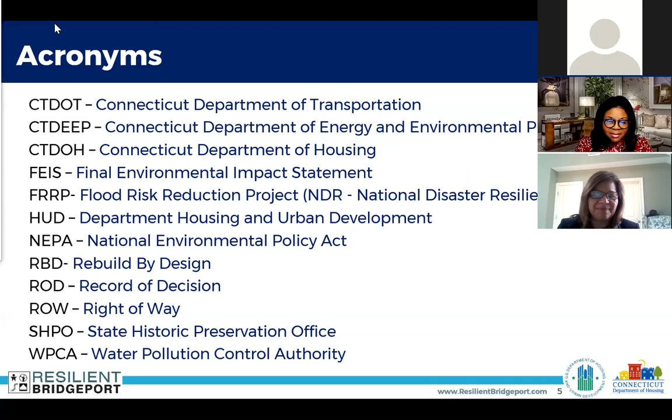Now I want to introduce you to the Resilient Bridgeport team. I am Shantae Hanks, the Deputy Commissioner of the Department of Housing. I don't recall if I said that when I welcomed you, but it doesn't hurt to say it again. Welcome. We also have Hermia Delaire, the program manager for the Sandy program at DOH, who also works with me lockstep on the Resilient Bridgeport projects. And we have Jeff Ozuski, our admin support.

For the Connecticut Department of Transportation, we have Brett Stark. We also have Andy Fessenmeyer, who is unable to join us, but he was part of our other two meetings, our other presentations of the 60% design. So we just want to shout them out.

From WSP, we have Rob Yergin tonight. You'll hear from Rich Pettinelli, Megan Savage—when I say next slide please, Megan, that's Megan—and also Grant Allaire. We have Kelly Reinhardt from Waggonner and Ball, and probably David Waggonner, who is traveling but calls in most of the time to support us during these meetings. They are urban and environmental architects. It's Kelly from Reed Hildebrand, landscape architects for Seaside Park and the Stormwater Park. Finally, I want to shout out DEEP, not part of the panel, but as I said in the beginning, they are one of our partners here and a sister agency. So I want to mention DEEP as members of the Resilient Bridgeport team.

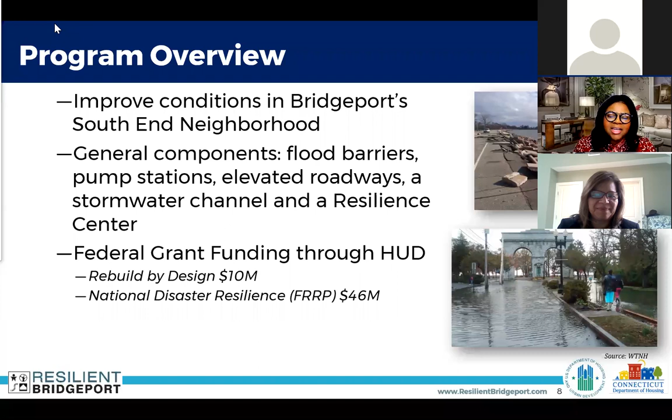Also, federal grant funding through HUD. As I mentioned, HUD is our primary source of funding for both projects: Rebuild by Design, $10 million, and National Disaster Resilience, that's the FRRP project, the one you will be seeing the 60% design tonight, that's $46 million.

Program status: NEPA, the EIS—the Environmental Impact Statement we talked about in the acronyms—and the ROD, and preliminary design are complete. Final design initiated for both projects. Programmatic agreement with SHPO—we're in a great place. Documentation mitigation of Seaside Park impacts, and the federal grant expenditure deadline extended to September 30th, 2023.

So this is the part where I pass the virtual mic over to Rich Pettinelli, our lead design for Resilient Bridgeport. Rich? Thank you, Deputy Commissioner. Again, yes, I'm Rich Pettinelli, the technical lead with WSP. This slide is just to orient us all again as to where these projects are.

The Rebuild by Design project is up in the former Marina Village site. We'll talk briefly about that tonight. And then the Flood Risk Reduction Project, formerly known as NDR, runs from the UB campus, Goodwin College campus, across the 60 Main Street parcel, and then up through the power plants, and ties into the rail line just north of Ferry Access Road.

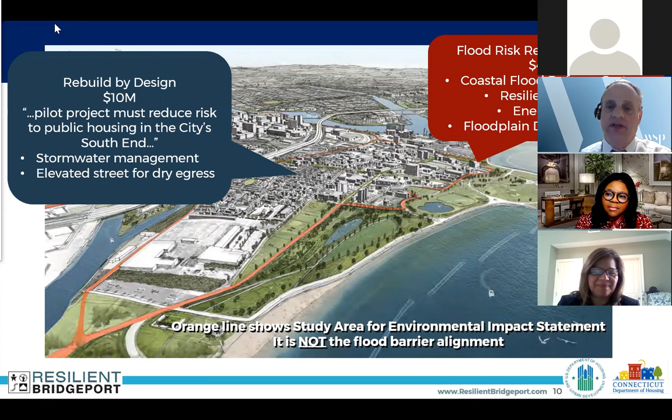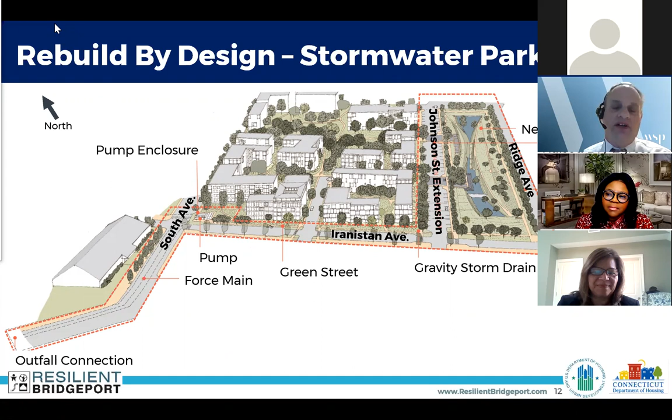So where do we stand with the projects? Rebuild by Design: this project is an extension of Johnson Street from Columbia to Iranistan Avenue. We will build a stormwater park to handle some of the stormwater in the area and alleviate some flooding situations. That park will drain north to a pump station we're going to construct at the intersection of South Avenue and Iranistan. From there, the stormwater will be pumped via a force main into Cedar Creek, located on the left-hand side of the screen here.

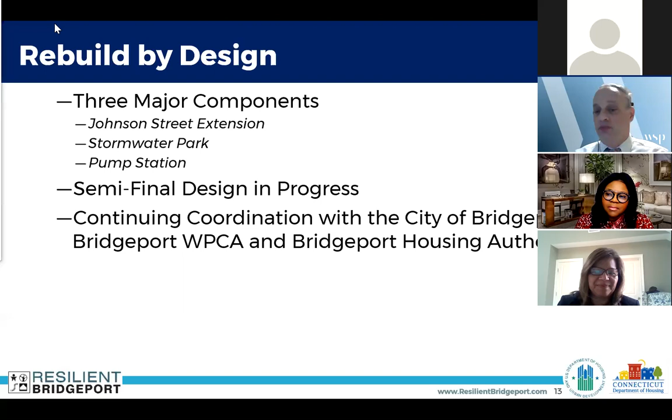So we went over the major components. RBD is in semifinal design with the 60% drawings, or semifinal drawings, due in about two weeks. We continue to coordinate with the City of Bridgeport WPCA for the Seaside Village separation project, and with Bridgeport Housing for the proposed redevelopment of the Marina Village site.

Next slide. This gives you an idea of the current alignment for the extension of the road and the stormwater park. This is not how the stormwater park will actually look in blue—this is just a representation of where the detention pond will be. We're working to make this a much more attractive feature than two squares like this, but we're going to have a slight bend to it. We're lining up properly with Columbia and Iranistan Avenue, and we do need to do a bit of work on the current Johnson Street to bring it up to the proper grade.

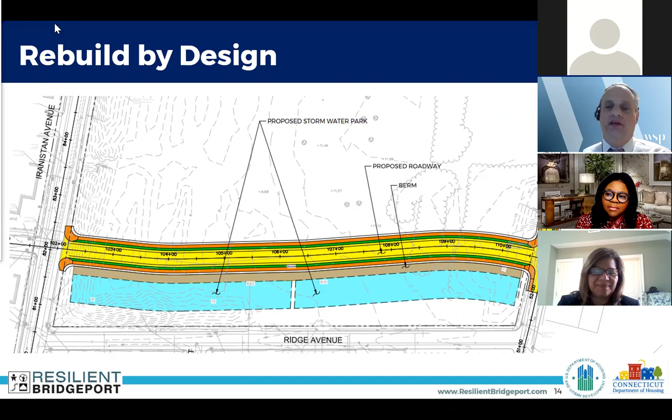Next slide. So that grade is a 100-year flood elevation of 14. That's the grade we're going to design the road to, or the minimum grade. That's shown in purple here, and the brown is the existing conditions. So it's a couple feet of fill, not an awful lot. And again, that'll provide dry egress to the east in this situation—you'll be able to get out of the area by traveling east and then into downtown Bridgeport.

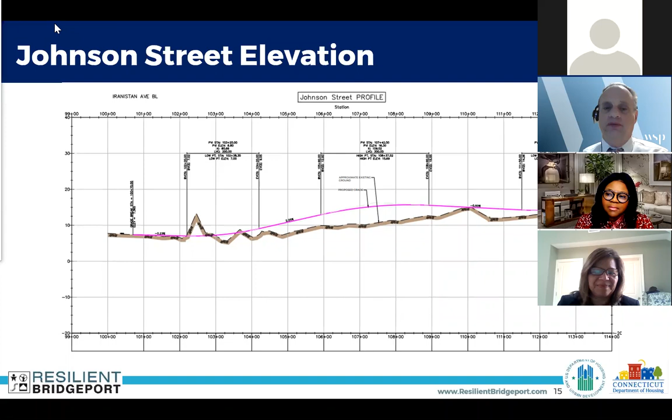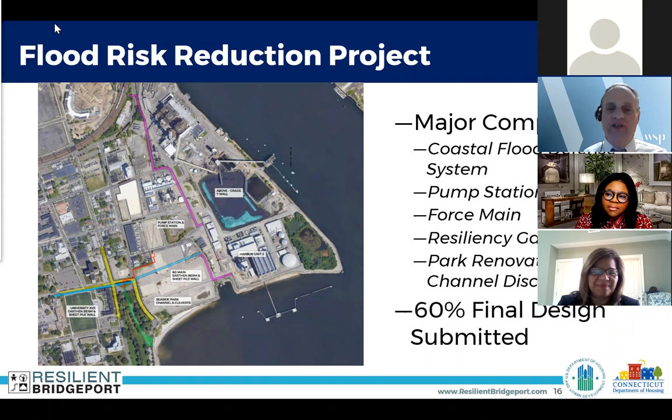Next slide. So as promised, this is the earthen berm, a cross section. If we cut it and looked at it, this is what we would see: it's just going to be granular fill, capped by a six-inch topsoil layer and grassed. This is kind of a temporary condition—there are other projects coming on that will work over this.

And in the middle, this is the coastal flood defense system. This is steel sheet piling, commonly called Z-pile, similar to the bulkhead you see on the shorefront. This is driven to a depth of about 40 feet, and this is the actual flood protection. This design allows us to work in this embankment area—it's not a levee or a dike, which has restrictions on working on the slopes. This allows us to get in there and really get future development relatively close to the coastal flood defense, without impeding development of the neighborhood once this project is in.

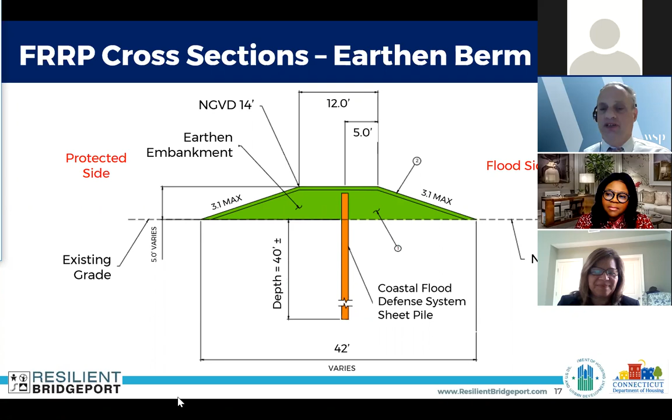This is the second technology that we're using for the coastal flood defense system. This is a concrete T-wall, called such because it's essentially an inverted T, an upside down T.

The stem wall is the actual flood protection. The horizontal area is a foundation to offer stability. This is seated on H-piles, which act as the foundation.

H-piles are essentially I-beams, or a building structure you'd see like in a garage. The steel sheeting looks like an I, it's also an H. That H-pile is driven down to refusal if we can make it, or to bedrock, and that is the actual foundation for the structure of the T-wall.

In between the H-piles, we run a 15-foot or so deep steel sheet pile, much like the steel sheet pile used in the earthen embankment. That is to prevent seepage underneath the concrete T-wall during a flood event, and that again goes to 15. It can be interrupted; it just leads to a little more seepage, and we account for that in the analysis of the wall and the design of the pump station.

So if we're going over major utilities and stuff, we can not put the sheet pile on and just span it.

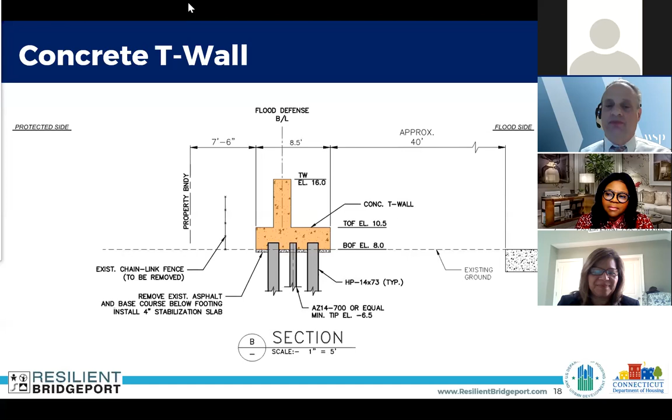Next slide. So briefly to touch upon the road work that we're going to be doing.

Broad Street is going to raise up at a 5% grade, cross over the coastal flood defense system, which is located in University Avenue, and then back down and tie in a little bit north of Linden Avenue. The top elevation, or the highest elevation, is going to be about 15.5, which is about 9.5 feet higher than the current elevation in that area.

Main Street, we cannot do a ramp up and over on. There are 3 houses or structures at the intersection of Main Street and Henry Street, to the south of Henry Street. Those 3 structures would be looking out at the ramp if we were to design it. So essentially from the second floor of the first structure, you would look out your window and see a car driving by. It really is an overbearing impact on those structures.

The decision was made, we cannot ramp it. We're going to instead terminate Main Street as a through street and install the Resiliency Gateway Park, which we'll have a slide to show what we're looking at a little later on.

For what we term Main Street South, which is the portion of Main Street south of University Avenue, that will be ramped back down, matching the slope at Broad Street with a 5% grade.

University Avenue west of Broad Street is going to become an earthen embankment. That area is already slated for redevelopment with Bassick High School, and we're just going to put our earthen berm there and allow them to do a plaza or whatever they choose to do on top of it.

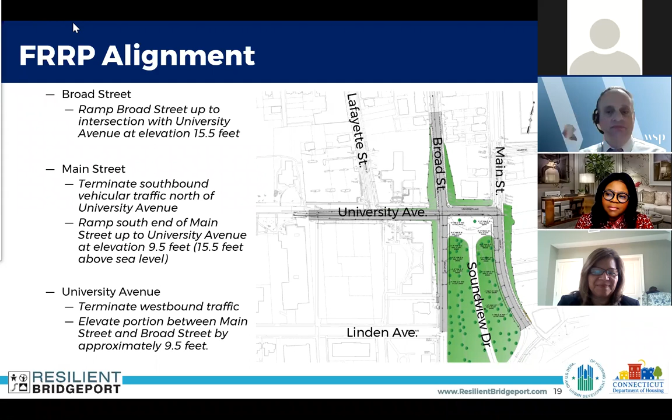Next slide. So Seaside Park, this is the area that we call head of park. And again, as the commissioner explained, it's bounded by Broad, Main, University, and the shorefront.

This area, the current horseshoe road that is there, is going to get elevated into a public plaza. We call that the Belvedere.

That will offer some public gathering space. It offers some wonderful views of the sound from up there. And it allows us to kind of hide the pump station discharge that we need to put into the park. So it's multifunction.

We took a look at what to do with this area of the park and studied it quite extensively. The original concepts, and some of the stuff you might have seen at the 30% presentations, had retaining walls on University and Main Street, and then the Belvedere, or basically a retaining wall, at the north end. The concept at that point was to minimize impacts to the existing park, and retaining walls are the way to do that.

When we took a look at it and really started thinking about what that meant, if you were at the northern end of what we call head of park, you'd be surrounded by 9.5-foot walls or more, as we'd have to put traffic protection on those walls as well.

So you'd be surrounded by walls anywhere from 12 to 14 feet tall. Light would be restricted, and it wouldn't be a very inviting place.

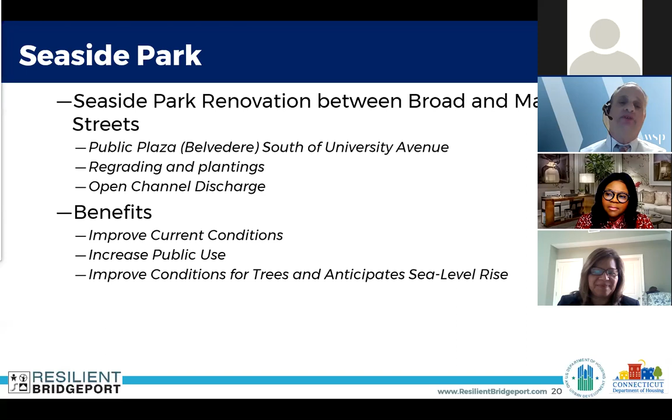Next slide. Some of you have probably already seen this. This is our design plan for the drainage system in the park. The left side shows the low flow condition, when we don't have a lot of water.

And I should preface this by saying we are putting a pump station in, and it is not the intent or design of this pump station to operate every time it rains in the neighborhood. The current drainage system works most of the time, and there's really no need to operate the pump—with the wear, tear, and cost of pumping—when the normal drainage system will handle it.

But we do recognize that the area is plagued by what we call nuisance floods. When we get a bad tide condition with a significant rain event, you all know you get water coming out of various catch basins.

To help with that, two things will happen. Contract H is coming in, which is a separation project by Bridgeport WPCA. But we also have this pump station, and it is an asset to the area. We don't want to just leave it idle for the next big coastal event—that seems like a waste of a resource, and it's not a good operating plan for a pump station. They do need some exercise.

So what we are designing is a connection to the existing drainage system on Henry Street, which is the main outfall area for this neighborhood. We will set a high level overflow, so when the water starts coming up in the drainage system, before it starts popping out of manholes, we'll pull off some of that water and pump it out.

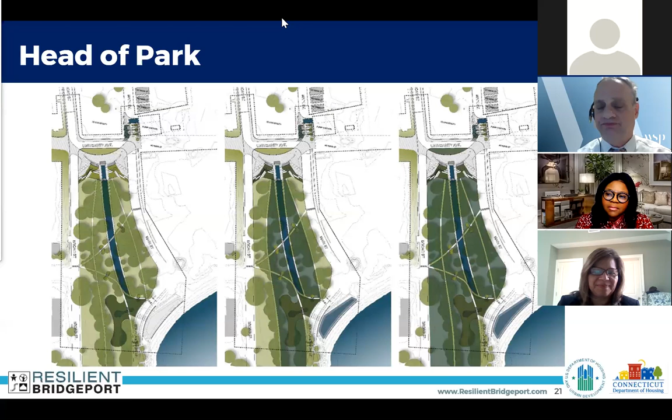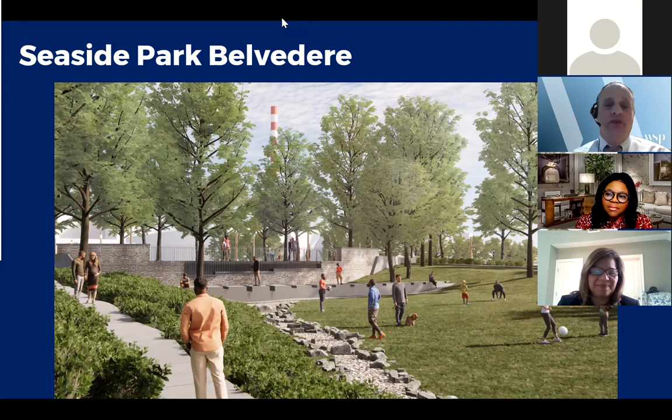Next slide. So this is the head of park. This view is from Main Street, looking northeasterly, I guess. You can see the tower, the harbor unit, or the smokestack that harbor unit 3 represented in the background. This is a view of what we call the Belvedere.

It'll be a stone facade. It'll have the discharge underneath it—I'll talk a little bit about that on the next slide. And then there's a stilling basin that the gentleman in brown pants is standing in, so it's not raining today. And then secondary weirs to allow the water to discharge from that area. The stone leading down to the bottom of the screen represents the low flow channel.

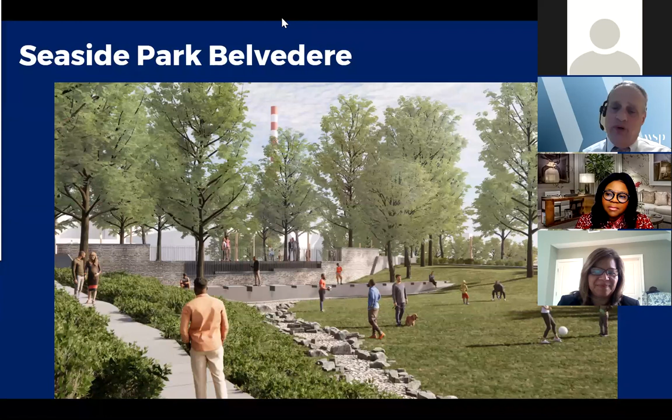So in a low flow, again, the water is in there. When we get one of those intermediate storms, this plaza area or the yard area where the lady's playing soccer and the gentleman's walking his dog will be flooded to various stages, but it is designed to drain back and dry out so it can be used again. And again, this is elevated and properly graded, so we don't have the standing water that the head of the park currently experiences.

Next slide. And I should mention, you can see that we'll put pathways and sidewalks in so that we can access the park and have a nice public experience there. This is a second view, from the Main Street side. So we're looking at maybe a little gathering area that we designed there. Again, we have the Belvedere.

This slide shows a little bit better the discharge from what we call the cistern, which is the tank that the pump station will discharge into. That'll be a multi-stage weir—a way of discharging the water. We keep it in various stages because this pump station is going to have a very wide range of flows associated with it. The low flow from the pump station is 12.5 CFS. The high flow from the pump station during a coastal event and a 100-year storm is 125 CFS.

So we stage the weir so we get some life and action to it. If we did one straight discharge weir or level, at the low flows it would literally just trickle over it—it would probably just cause moss and mold to grow at the corner. We want some action and velocity associated with it, so we stage that weir so the various levels of flow all get a little bit of play to the water and add some interest to it. Again, at the 125 flow, it's going from edge to edge, and quite a lot of water is coming out.

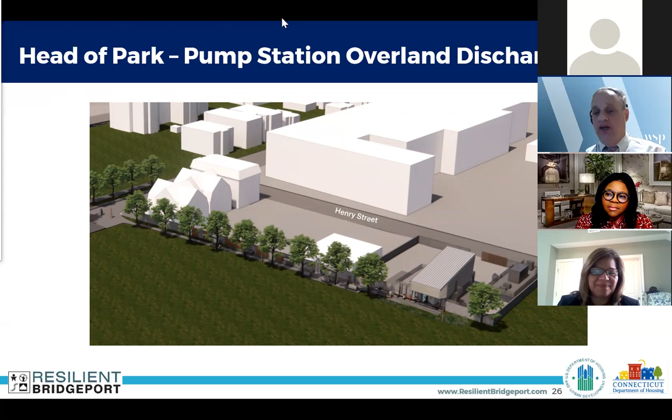This just shows the water route that we're going to have, and we'll explain it with signage all the way through. The pump station's up here on Henry. It goes through force mains, underground pipes, down to the cistern at the head of Park, and from there it exits that weir and goes through the open channel at various stages before discharging into Long Island Sound.

This is green technology. The channel offers an opportunity to clean the water with various plantings and filtration. So this is a very good way of treating stormwater, and we have a nice long run coming down. We will improve the quality of the water that we're discharging.

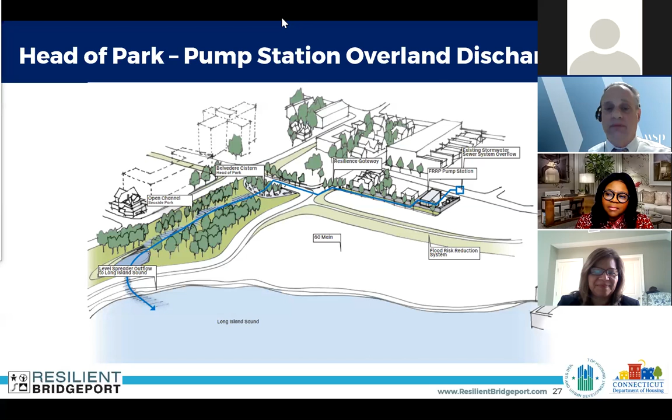These are some architectural renderings of what that pump station experience might be. You can see on the left-hand slide, there's a gentleman in the middle in the shade. He is actually looking through a viewport — we are going to put a window in that looks into the wet well.

So you will be able to see at least one pump. We're evaluating the actual view shed in there, but you will see at least one pump and understand what's in that pump station. Again, in the electrical room, which is located above, there's literally nothing to see. The area has an overhang so that, if a classroom or something wants to come and review the water that's going through and the water cycle we're looking at, there's an area to gather.

And again, we'll put educational placards here. The right-hand view shows that potential path to it. We're looking at possibilities of putting in some old pumps here, cut open, so you could see the inside workings of a pump, a section of the piping, the force main. An idea we're exploring, which I kind of like, is benches actually made out of that pipe — it's 36 inches, a pretty good sized pipe — giving you an idea for the magnitude of the infrastructure we're installing here.

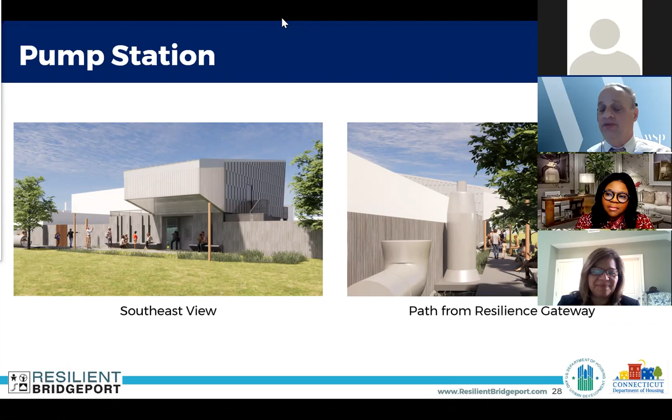Just two more views here that show that pump station from 60 Main Street, and the right-hand view shows the lighting accents that we can do at night to make this honestly one of the most attractive pump stations I've ever worked on.

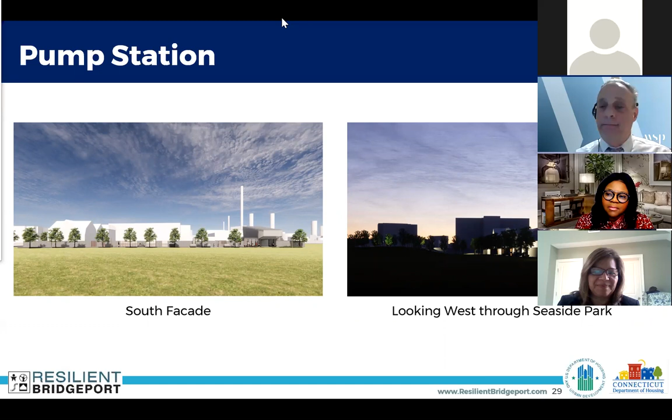So with this coastal flood defense system, this is essentially a wall that we need to install to keep the neighborhood dry, and during normal days we don't want that wall to be an impediment to travel. So we're going to install a number of gates that are open most of the time, with the exception of an impending coastal surge.

There'll be gates at Broad and Main Street, a gate to access the outfalls by Harbor Unit 5, gates along Atlantic Street, and gates to access the PSEG property to service the industrial uses on the north-south alignment, and a final gate at Ferry Access Road.

We're using two types of gates in this project. One is a roller gate, which I'll explain in the next two slides, and the second type is a stop log gate.

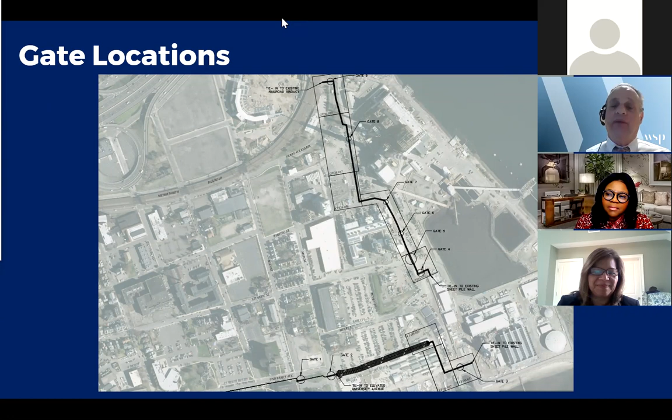So this is the roller gate. We're going to use this at Atlantic and Ferry Access Road. It's a steel door that slides back and forth, usually activated by a pickup truck attached to a winch that pulls it shut. It's easy to open and close, quick to do so, so these are used in areas where we want to really establish connection back through as soon as possible.

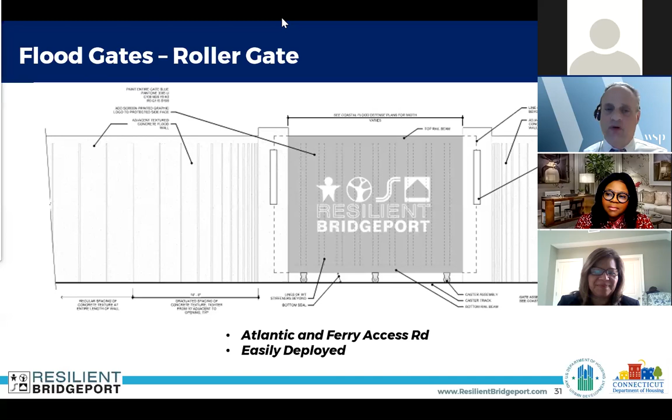It does require a little bit of maintenance. We have to keep the wheels greased and oiled, and keep the track clean and the receptacle it slides into clean. So there is maintenance required, and these are exercised quarterly or yearly just to make sure everything's working properly.

This is the second type of gate, the stop log gate. Under normal conditions, there'll be one of these at Broad and Main Street. So if you cross Broad and Main when we're done, on a normal day like today, you will see an 18-inch concrete grade beam. Instead of asphalt, there'll be 18 inches of cement in the roadway, with receptacles that accept bolts and allow us to set up pillars.

The number of pillars set up is dependent upon the width of the gate, because these stop logs only come so long. But in the event of an impending storm, the pillars are put in, the road is shut, and stop logs are stacked to the required height. At Broad and Main it's only 3 or 4 feet, but some of the others get higher than that. These stacked logs act as the continuation of the flood control, and allow the road to be open during normal days.

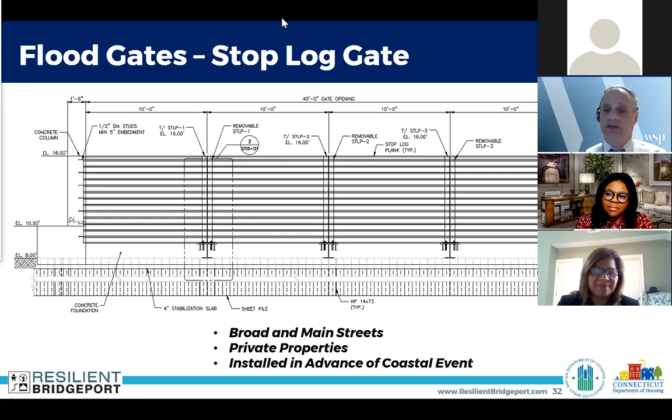Once the coastal event passes, somebody comes back out, we pull those stop logs out, the horizontal lines you see here, take out the pillars, and put everything back to normal, crossing over just a concrete grade beam. These are used at Broad and Main, and most of the private property gates along the industrial section. They're a little more labor intensive than the roller gates, but they offer advantages and are pretty easy to deploy.

So we are doing some road work. What's that going to mean to the neighborhood, and how are we going to approach that? This next series of slides will talk about the sequence of construction that we envision.

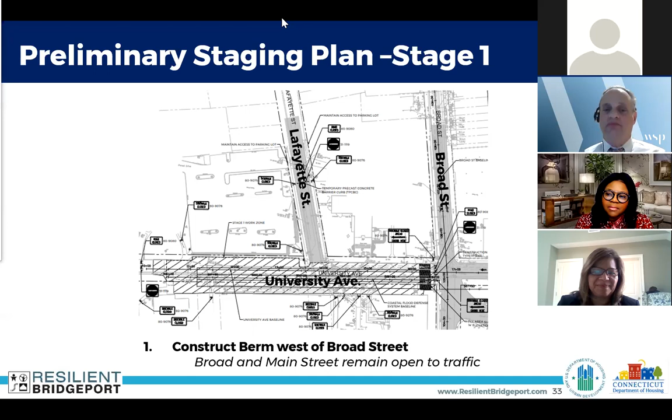The first step is to build the earthen berm from west to east, starting on University Avenue. At that point, traffic between Lafayette and Broad Street is shut, and Lafayette is shut to turn around into parking lots. We start constructing the earthen berm and install the steel sheet pile to Broad Street. At this point, all the roads are open in phase one.

In stage two, University is done, so that earthen embankment is complete. We then shut down Broad Street and University between Broad and Main. We construct the earthen embankment and the steel sheet pile coastal flood defense along Broad Street, between Broad and Main Street.

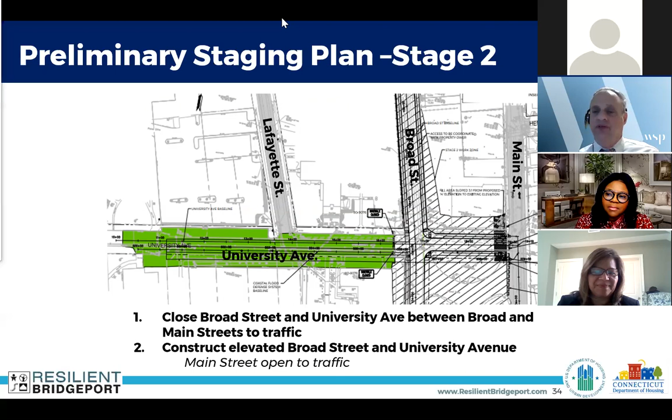At this point, Main Street is open, Broad Street is closed. So now we're done with stage two. Broad Street is open to traffic again and is paved and functioning.

University could still be paved, maybe not, but we will shut University at Broad Street at this point. We now shut University at Broad Street and we shut down Main Street. So we build the pocket, the resiliency gateway, and we build the elevated section of Main Street South.

Between these two phases, the Broad Street stage 2 and the Main Street stage 3 phase, is when we're doing the work in the park. The work in the park has to span both of those stages because of the grading. The grading in the park ties into the grading of the roads. So we can't just build the park and have basically a soil facade at Main Street, and we can't do it the other way either with Broad Street. So we'll be working across that park as we continue the project from Broad through Main.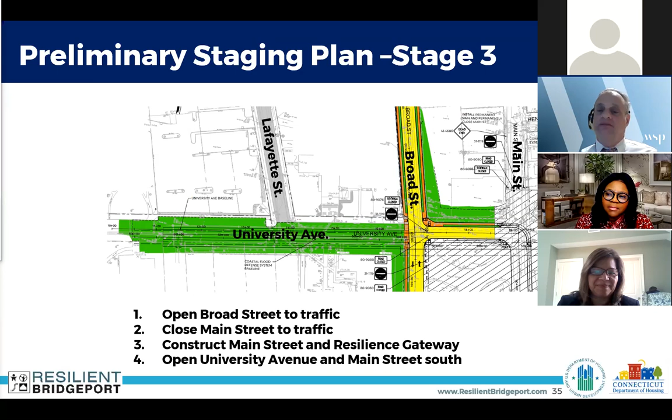This is stage 3, when Main Street is complete. That again is open to traffic south. It no longer allows access across the coastal flood defense system. At that point, we can continue working on this and the concrete T-wall as we move further east and then turn north to the rail line. That essentially is stage 4 of the construction.

Schedule-wise, as I said, we did submit the 60%. We are in the middle of, or starting, the permit application based upon those drawings. Those will be going in late spring, early summer. We will have a 90% semifinal design public meeting. That'll be done in the fall. We are handing in the 100% design early winter 2021, anticipating our permits about a year from now.

Construction starts, bidding is in spring, construction will start in late spring, early fall of 2023, with completion anticipated in 2024. That's completion of the coastal flood defense system in the spring. The pump station might lag a bit. It's actually a longer process than building that complicated-looking T-wall, but the pump station has more lag in it. So that's the schedule that we have.